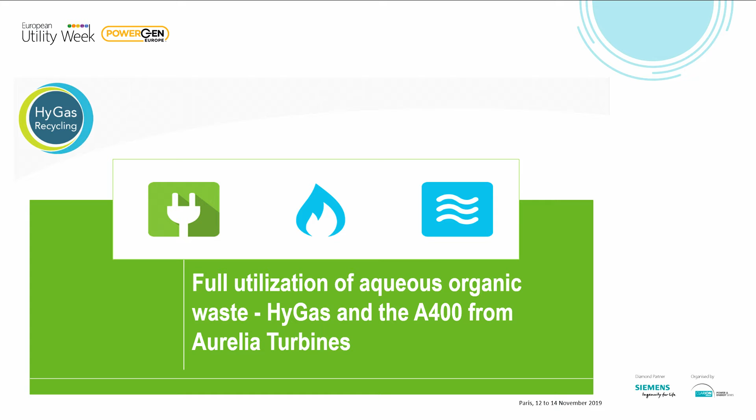I think it's a little different topic I'm talking about. It's more about innovation, and that it's not only about power generation when we talk about a sustainable society. I will present our project, which is the HyGas project combined with an A400 microgas turbine from Aurelia Turbines, a Finnish company. And it's all about the full utilization of watery organic waste. What is this? I'll try to explain in my next slides.

So what you can see on this picture is the HyGas recycling plant. This disposes and treats fermentation residues, manure, and sewage sludge. It creates in a special process syngas, a high calorific gas, which is then burned in a gas turbine. It's a pretty small plot which you need to operate 24,000 tons a year of fermentation residues. To give you a figure, it would be the residues of a 200,000 inhabitants city, a small, medium-sized city.

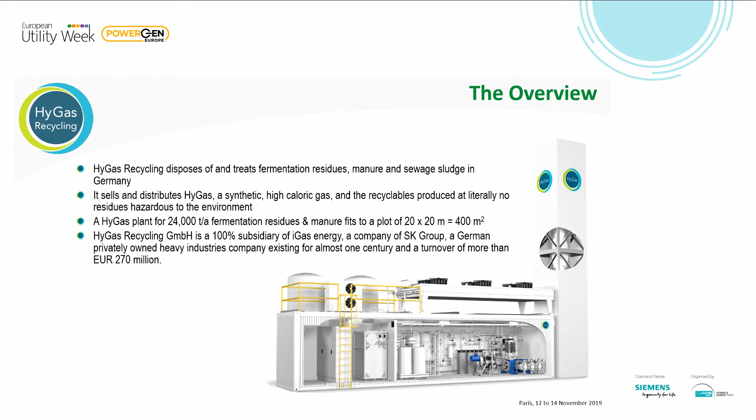This HyGas company is a German company owned by a private company called Schmidt & Kranz Group, heavy industries, more than 100 years already in business. And it's not only about CO2 regulations, it's about other EU regulations. In this case, it's the Fertilization Directive, which is the key driver for such a solution. This simply states that in the future, you must not bring out the residues, the manure, the watery organic waste to the fields anymore, for instance, from biogas plants.

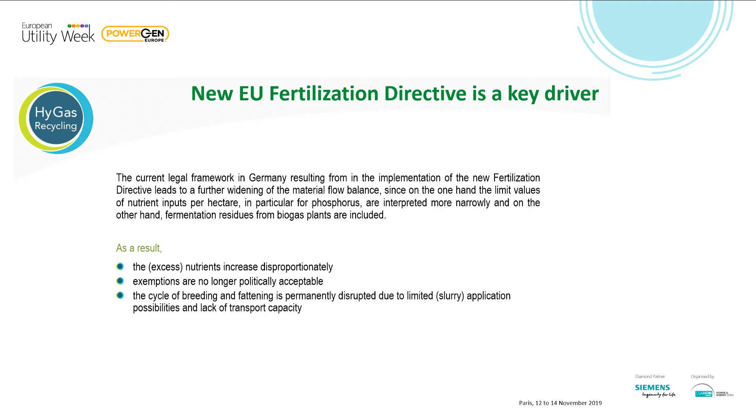How much waste do we really produce? For instance, this is the figure for Germany. We have organic waste quantities of around 20 million tons of dry substance. 24,000, as I said, we use in that single plant.

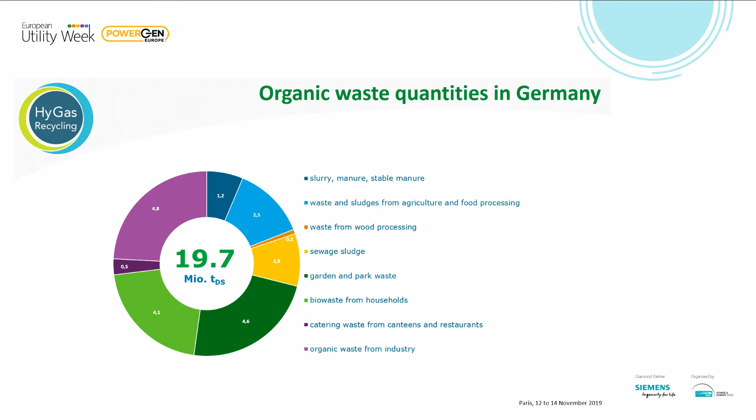This is a picture which is made to be remembered. That's the way it is drawn. What you see on the left side of the picture is what we take out from the biogas plant. It's digestate and manure in a certain amount. We mix it, and then we have an overcritical water process, where we heat up this overcritical water, and by that, at certain temperature levels, sand and solids, metal salts, nutrients fall out, and last but not least, there is a syngas forming at high temperatures of around 700 degrees.

And this syngas we feed into the Aurelia gas turbine, which is a 400 kilowatt gas turbine, and use the power produced not for power generation, just a little surplus goes into the grid. The rest is used to produce the high temperature heat in the process.

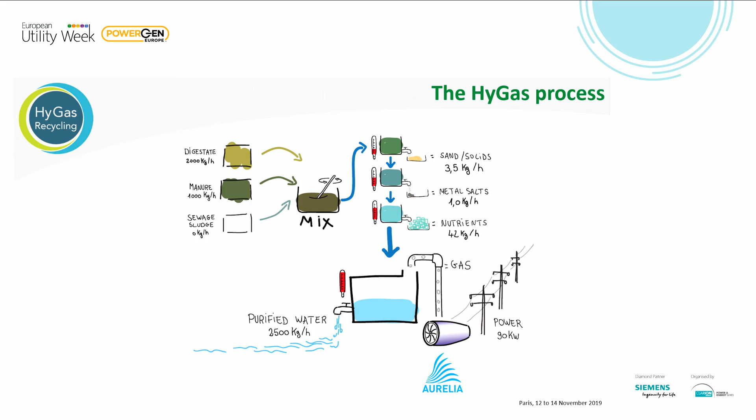So here you have the mass and energy balance of this process. On the left side, for this one particular project, we have 2,500 tons of fermentation residues and 20,000 tons of liquid manure, which enter into that process. And by that, you see the 6 recyclables which come out of that. Electricity, the yellow one, is a surplus of around 200 kilowatt electrical. And this is done by the Aurelia gas turbine.

A further recyclable which comes out of this, and we spoke about that already, is the hydrogen. It's enough hydrogen to fuel, for instance, one fuel cell car an hour. And the majority part of the recyclables coming out is clean water, which you can lead into the environment without any further treatments, even according to the high German standards.

Alternatively, and my predecessor had already spoken about that, you can have different fuels. So you can use raw sludge, you can use green waste, you can use organic waste, all what you can feed into an organic watery waste portion.

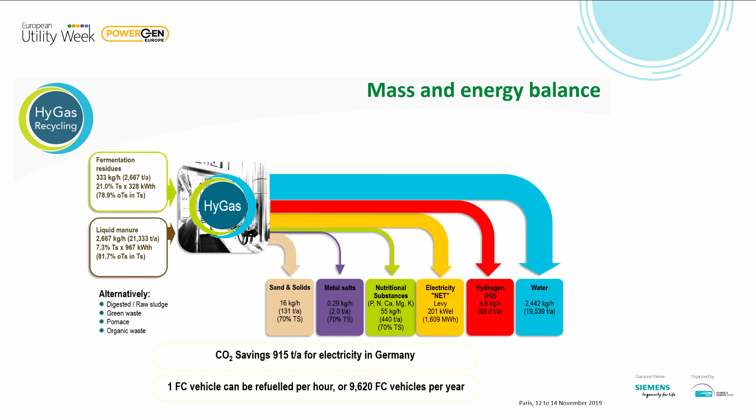So now we come to the gas which is produced here. This is again something which is somehow in line with the presentations you heard before. It is all about turning this organic waste into methane, mostly, some ethane and some hydrogen. The CO2 you see here, which is 34% of CO2, this will form only if you reduce this watery solution.

You have to imagine that you reduce the pressure in this watery solution, and at each step of pressure, there is another gas coming out of this watery solution. And if you extract this gas at 40 bar, for instance, almost all the CO2 would remain in the watery solution, so that you obtain a gas at 40 bar, mainly consisting of methane, hydrogen and ethane.

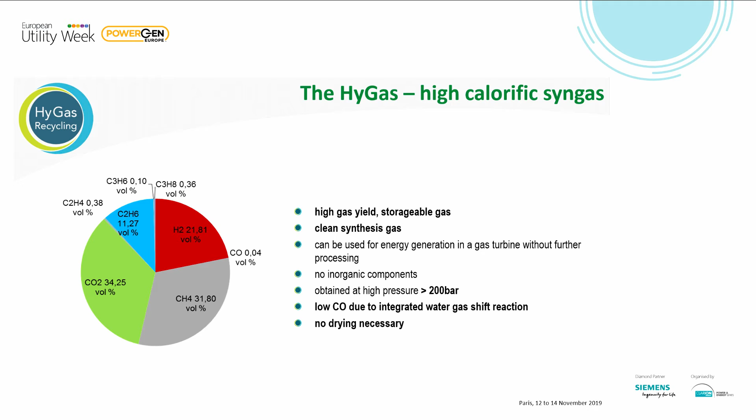This is now the switch to the gas turbine. It's an innovative project on the side of the HyGas project, and it's an innovative solution: the Aurelia A400 gas turbine design, with all the standard advantages a gas turbine has, like low emissions, no lubricants in this case, low maintenance and high availability. What is a particular advantage of the Aurelia gas turbine is a very high efficiency. I will come to that and describe how this is achieved.

The efficiency of this 400 kilowatt machine is above 40%, and even in part load conditions, down to 40% of part load, you still have efficiency of more than 40%. And the fuel flexibility, which we need, because in this case we want to blend the biogas with the syngas we produce in the HyGas. So we can handle the content of the CO2, the composition of the gas, and by that form a very special gas, an artificial gas, a syngas mixture, which then is burned in this gas turbine.

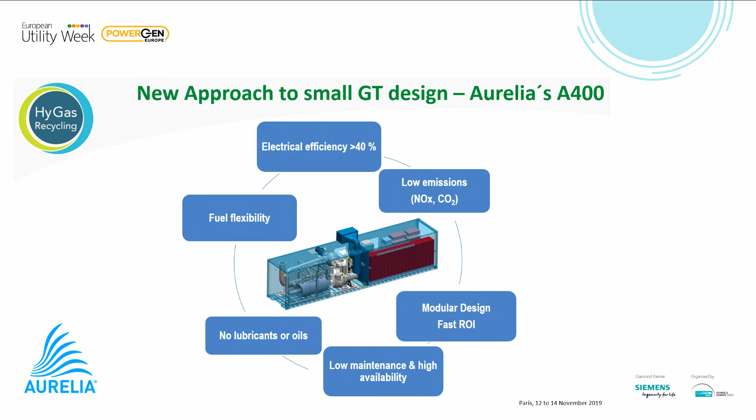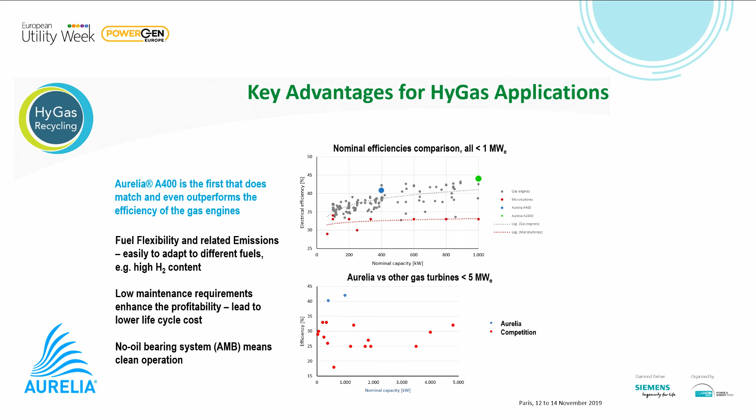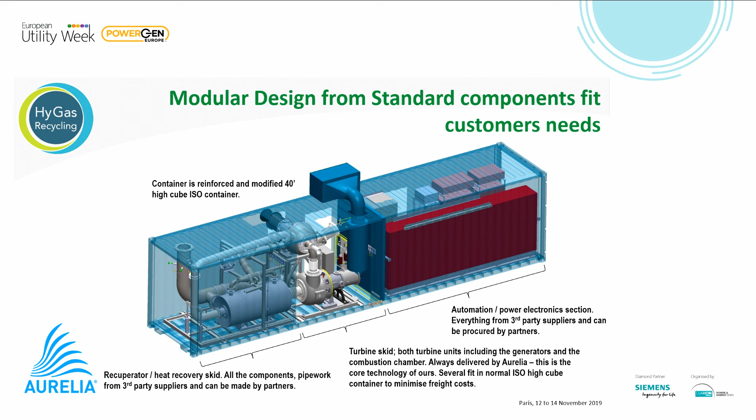How it works. It is an innovative gas turbine, an intercooled, recuperated two-shaft engine. It's a complex system, but it's not very complicated. You have two shafts, a low pressure shaft and a high pressure shaft, each equipped with a generator, a compressor, and a turbine. After the low pressure compressor, the compressed air at 3 bar enters an intercooler, and from there it enters the high pressure compressor, saving a lot of high pressure compression work, leading to a low temperature at the outlet of the high pressure compressor, which then makes the recuperator more efficient.

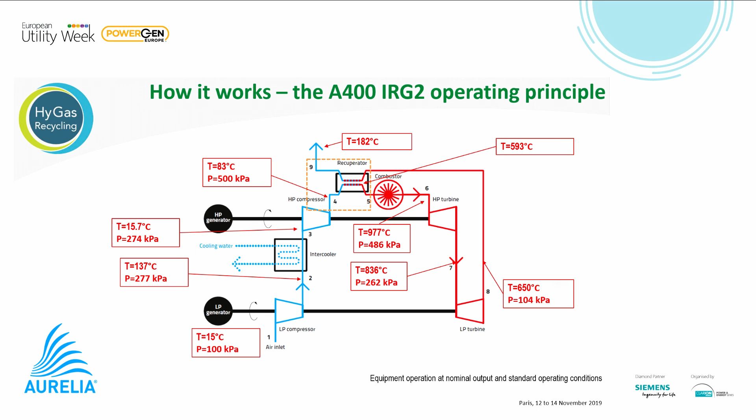So the project I was presenting, this innovative plant concept with two innovative products, is a project which will be built in Germany. It is attached to a biogas plant, so it is a real plant, where the biogas plant delivers the fermentation residues, and all the manure, the liquids from the animal farms surrounding this plant, will be delivered to the plant to produce valuable recyclables. It will be a leased plant operated by us. And it's a pretty low investment. If you consider this as an investment for a 200,000 inhabitant city, then this is quite a low equity requirement.

What's interesting in Germany, although there is a legal framework, it is quite clear that these permits or this plant development takes a while. We started in June 2018 with applications for permits, and in December 2018 they were granted, half a year later. And now it took us almost a year to set up the plant, and it will take another year to get into operation.

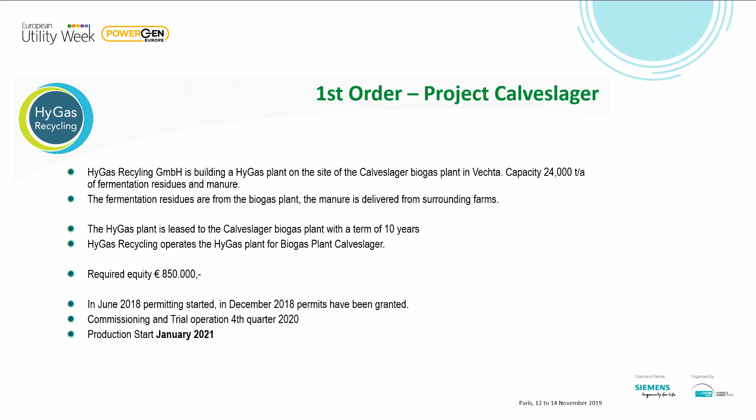So this was my short presentation of this micro gas turbine application.